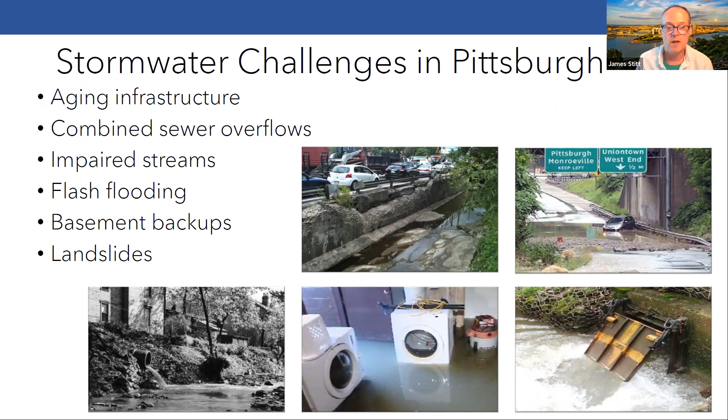So a little more than 75% of our system is combined. But these stormwater rules and regs apply to the entire city of Pittsburgh in the hopes of eliminating that water from getting into any of these systems so that it's better managed on site.

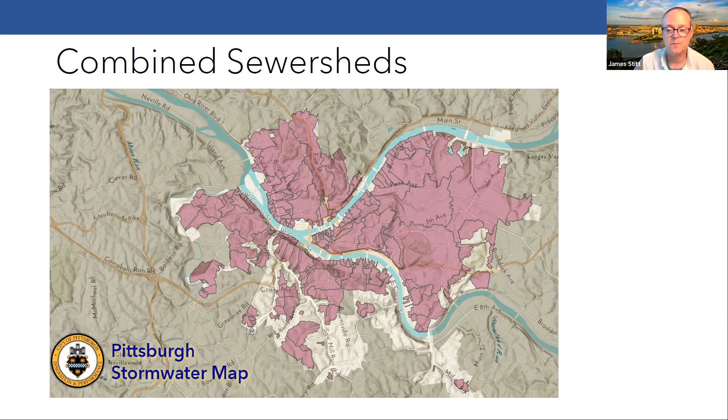And these are events with heavy downbursts, large amounts of rainfall, heavy wind, lightning, hail, tornado force winds, etc. These are the big cloudburst storm events that we see, and they're becoming much more frequent, and they're also a type of storm that our system was never designed to handle. It can handle large amounts of rain when it falls over an extended period of time in slow, steady rainstorms, but these severe events are what cause most of our problems with those high volumes of water getting into the sewers and overcoming the capacity of our system.

So we needed a better way to manage that, not just from a project standpoint, but from a policy standpoint. And so we started working with the city of Pittsburgh on what changes could be made, what we can do. We were able to get some funding from PWSA to address changes in stormwater code, along with support from the Heinz Foundation that allowed us to launch this project of analyzing our code, looking for issues and problems and gaps in the code and ways to make the code itself better and easier to use and follow, as well as ways to make the code more impactful from a standpoint of managing greater volumes and improving water quality.

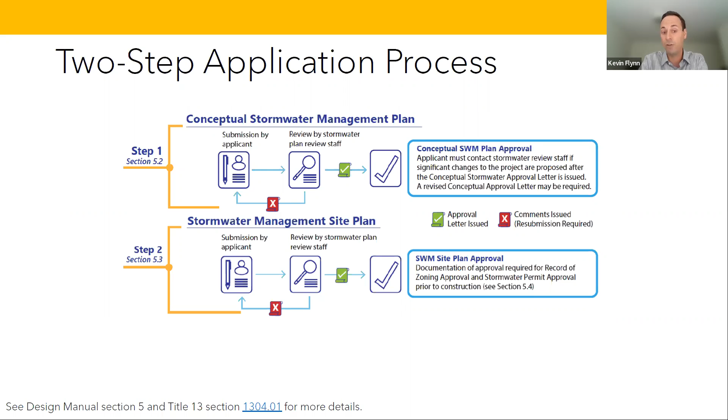Another focus of the update was really, as Marty mentioned, just to align the code with the city's goals and PWSA's goals related to public health and safety and flood reduction specifically. Sorry, next slide here. So one of the new policies actually involves implementing more stringent stormwater rate control requirements in certain areas of the city that have seen significant impacts of flash flooding, as well as basement backups to residents and businesses within those areas of the city.

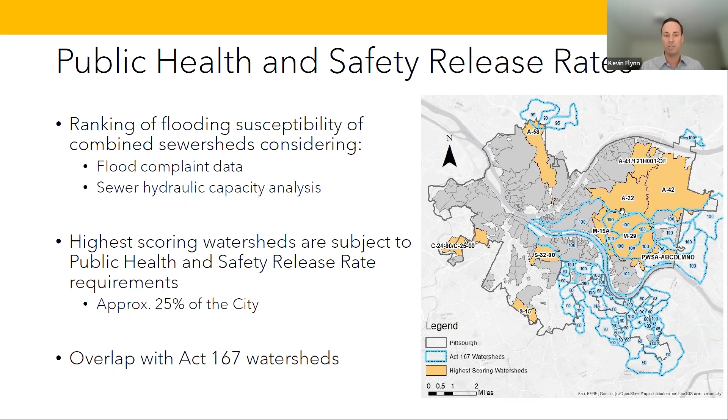So we also looked forward with the guidelines and standards for the design of stormwater management systems in the city. And we strive to incorporate really the most recent climate science and local projections as well, related to the changing rainfall patterns that James presented on early in the presentation. There were really two aspects to that. First was looking at smaller, more frequent rainfall events.

Here, the code defines a 95th percentile rainfall event. So that event is basically a size of a rainstorm that encompasses really 95% of the stormwater runoff volume that's generated in the city in any given year. We looked at that event, which is tied to regulations for stormwater volume reduction and water quality, and looked at historic trends and how the size of that event has changed over time. So the past code identified that event as a 1.5 inch rainfall event.

So analyzing historic rainfall data and trends, based on 67 years of data, we developed a trend of how that event has changed over time, and projected that to the year 2100, which is the planning horizon and basis of the new design guidelines. The requirement is now to control for volume and water quality for an event that's projected in the year 2100, and that's 1.66 inches of rainfall, whereas the past code was 1.5 inches.

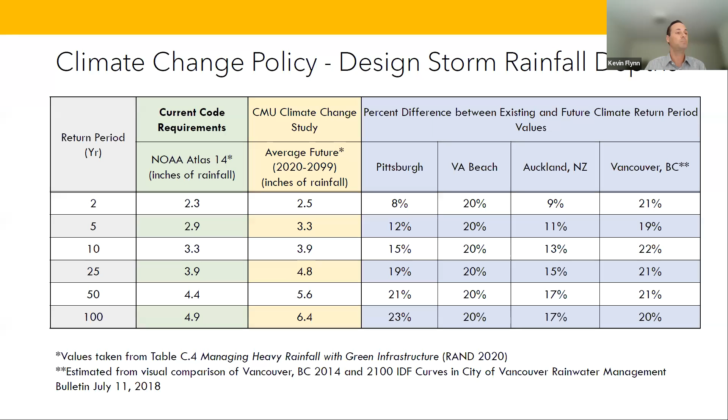And again, as part of that process of evaluating different policies, we did undertake a detailed cost analysis of the impact on the development community of these new regulations. So with increasing the guidance related to required future rainfall as design targets, along with that comes potentially the need for larger stormwater infrastructure and larger stormwater best management practices on development sites. So the question is how much larger? Does it make these sites no longer affordable, or does it affect the pro forma of the development project?

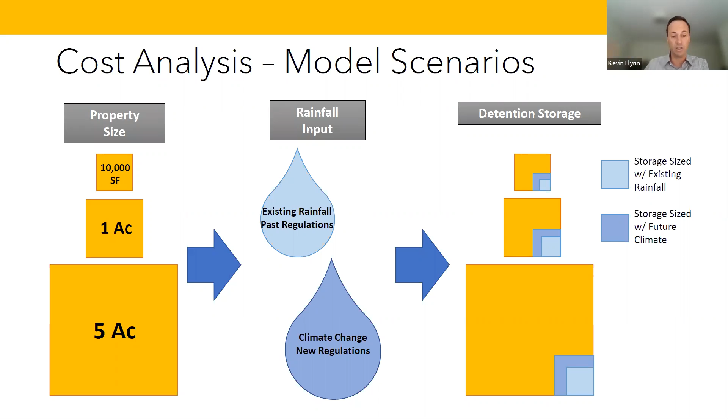And being very transparent with all the stakeholders. Yes, we would be asking development projects to do more and create more stormwater storage to account for these larger events. The analysis showed that can be anywhere between 29% larger and 42% larger, depending on the type of development and size of the development.

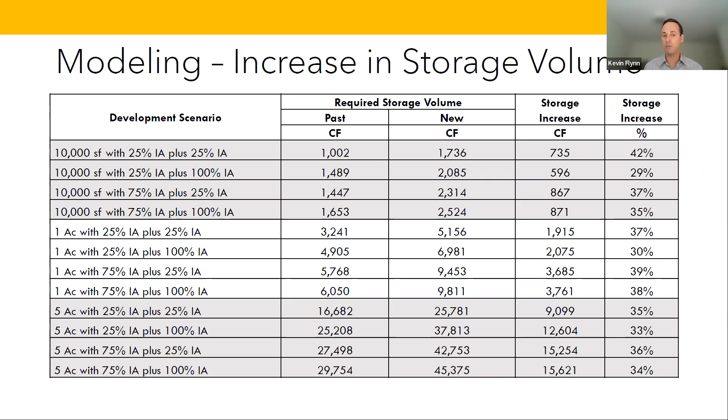And we were able to quantify that as a marginal cost, because as I mentioned, these are all projects that would already be triggering stormwater regulations. So the ask to the development project is to make those systems marginally bigger and to account for these future climate conditions.

Another policy to highlight is the policy and guidance related to technical infeasibility and the use of in lieu fee, as basically an alternative to on-site stormwater management. So really a goal of the city and PWSA is to encourage on-site stormwater management from these development projects. But we understand there's, in many cases, physical constraints or geological constraints which may not allow for compliance with the stormwater regulations on any given development site.

So previously, under the previous regulations, the developer's engineer was really just to come make their case on why it's infeasible, and then for the developer to actually tell the city what they thought the cost of on-site management would be, and that would be the cost of a fee in lieu payment.

So the new policy defines a very specific process to get to that technical infeasibility determination, where the developer's engineer needs to really walk through all the different options on site and demonstrate why infiltration is infeasible, why water reuse might be infeasible, why the use of green infrastructure technologies might be infeasible, and to demonstrate that before being able to apply for a fee in lieu as an alternative to on-site management.

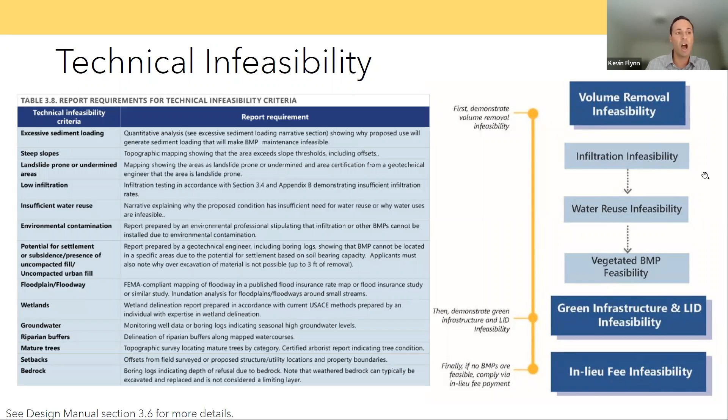And I mentioned before the previous fee in lieu was really based on a developer's engineer's estimate of construction cost, of really first cost to build a BMP on that specific development site. So we took a look at that as well, and what that fee really needs to accomplish would be for the city to potentially create an equivalent stormwater management project somewhere else in that watershed. And the fee in lieu payments previously really didn't account for that in any sort of real way.

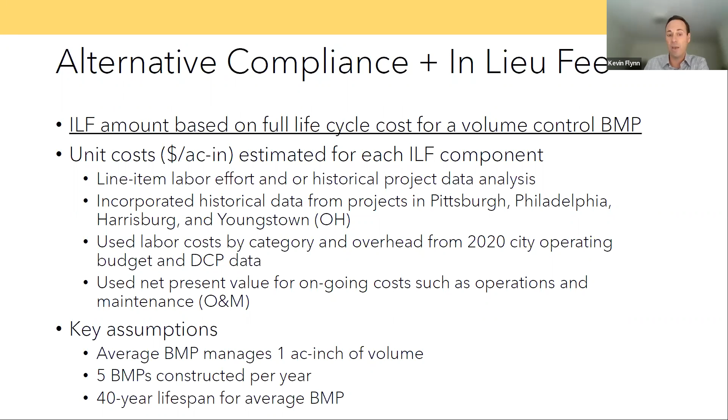So we took a look at resetting that fee in lieu to really match with what it would take for the city to implement an offsetting capital project and operate and maintain that project for what we've assumed a 40-year lifespan for that piece of infrastructure. And this is a bit of a breakdown of that analysis. So as I just mentioned, the previous fee in lieu is really based on those first costs and those construction costs of the stormwater management system.

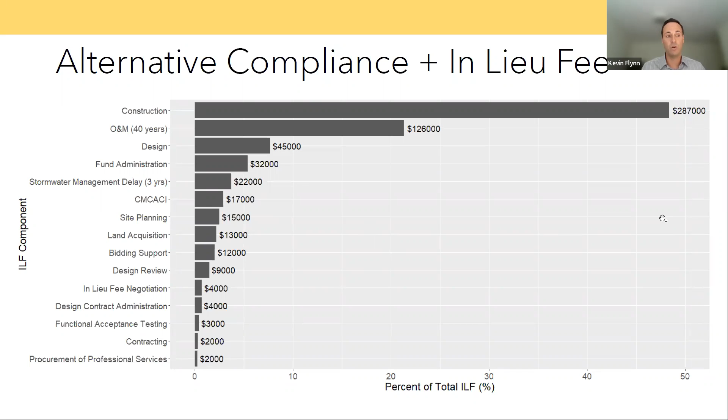But as you can see, that first cost is a little less than half the fee in lieu cost under the current policy. So really looking at real cost to implement an offsetting project, because the goal is to get that stormwater management in that watershed to respond to that development project. So if that can't be done on site, we need to be realistic about what it's going to take for the city or another entity to eventually offset the impacts of that development project.

And Marty mentioned it as well. It was about getting better stormwater management performance on development sites, protecting public health and safety. We recognized in doing that could potentially impact these development projects. So to offset those impacts, a major focus of this project was trying to identify policies that can provide more flexibility as well as more certainty for developers as they go through the stormwater plan review process in the city.

So these are some of the examples of new policies that were implemented along with the new code. Things like expedited review for what the city and PWSA have identified as preferred stormwater management technologies. Actually setting up the program framework for the city to be able to use some of that money that's paid into a stormwater trust fund derived from those in lieu fee payments, and be able to actually use some of that money on private development sites.

Maybe the development project is in a strategic location for PWSA or the city where there's flash flooding issues or other types of drainage issues where that stormwater management can have a big impact, not just on a development site, but within the community.

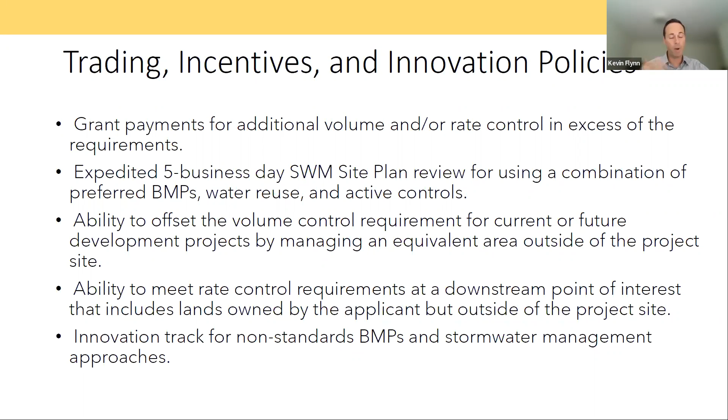So there's now enabling policy within the code that would allow the city to actually provide a grant payment to a developer or to a development project to go above and beyond the regulations. There's also opportunities for development projects to offset and create a banking and trading framework for development projects and landowners that would allow them to maybe construct stormwater management on one portion of their property or even another site with common ownership that maybe is a more advantageous opportunity to construct stormwater systems and possibly at a lower cost for the developer.

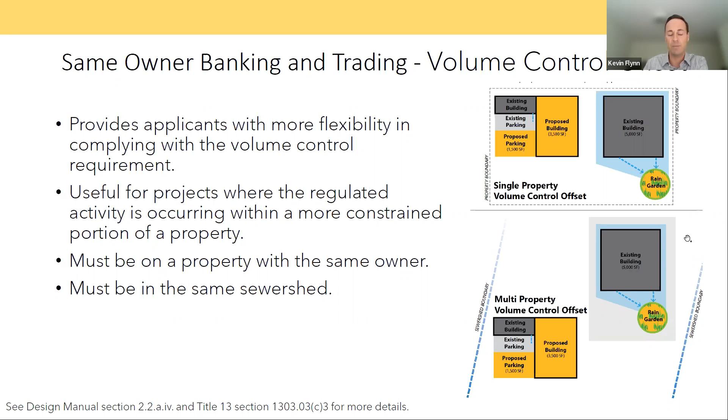So another part of making that development process more predictable and transparent was creating resources for the development community. So the key resource that was created as part of this project was a stormwater design manual for the city of Pittsburgh. But we also see it as a regional technical resource too. So it's a combination of technical resources for the design, construction, and maintenance of stormwater management systems, but it also includes process guidance for developing these projects within the city of Pittsburgh.

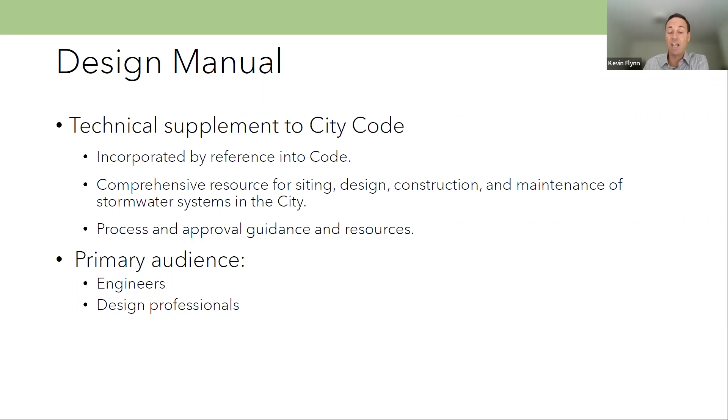And it's implemented in the code by reference. So if there's updates to technology or best practices related to technical guidance and aspects of design of stormwater systems, there's ability to update this guidance without going through the legislative process that Marty mentioned. So I'm not going to go through the entire manual and contents of the manual. It's available to the public. It's available online. I encourage those that are interested to seek out that guidance, and we provide some links to it as well.

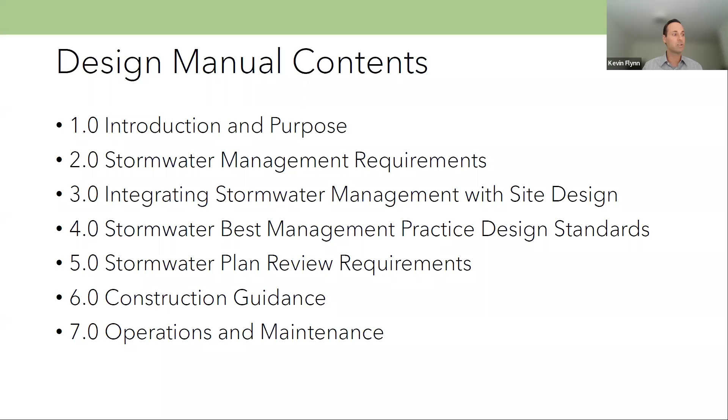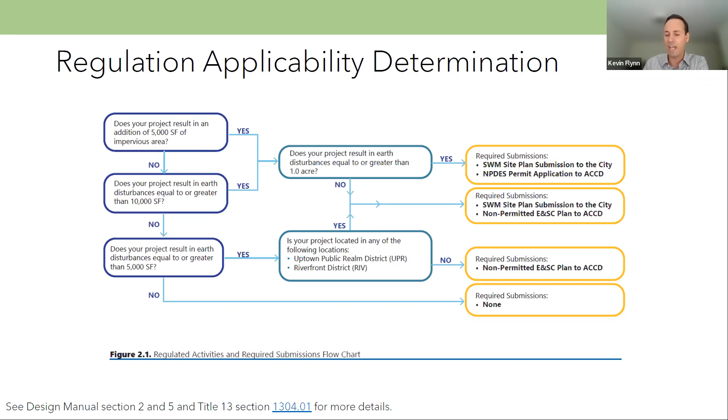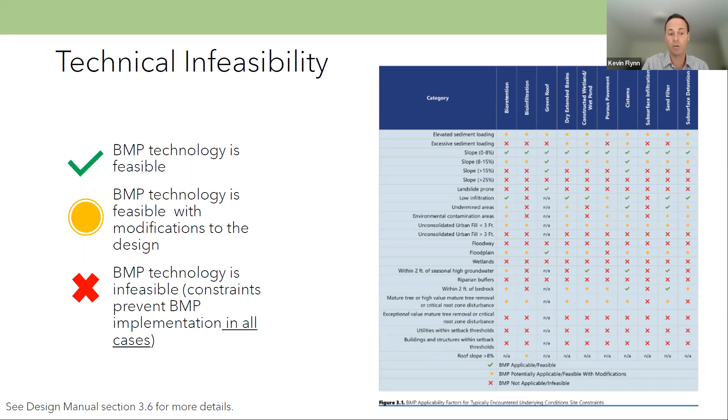I mentioned the technical feasibility. We've tried to map different guidance and potential feasibility obstacles for all different stormwater BMPs to different physical conditions that might be encountered on a development site in the city of Pittsburgh or really anywhere in the region. And then also general guidance for siting and locating stormwater best management practices, and then very specific guidance as well for different types of stormwater management technologies.

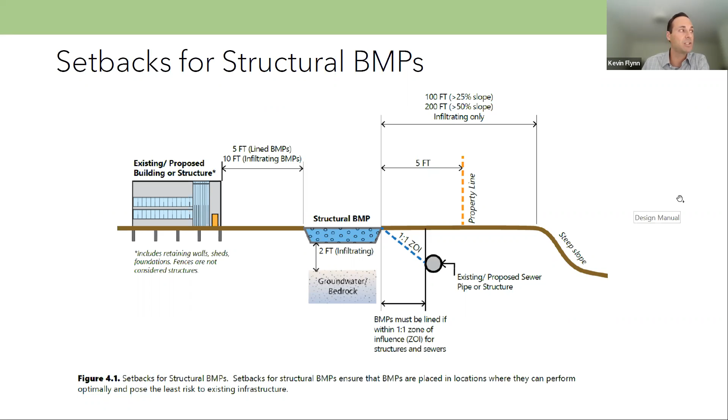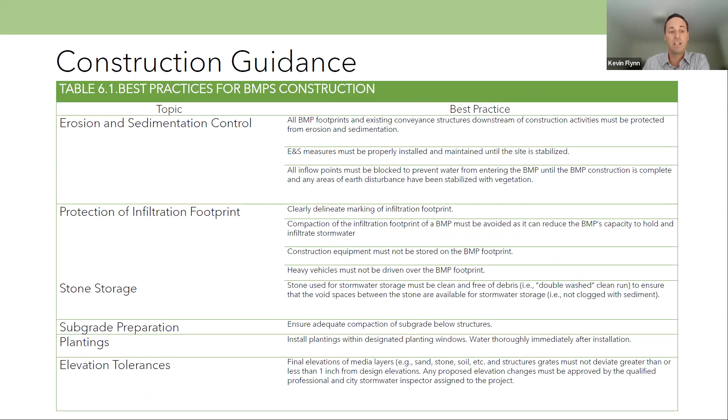Guidance for construction best practices, as well as guidance tied to required inspections by the City Department of Permits, Licenses, and Inspections. And then just simple checklists to help applicants produce complete applications to the city, as well as try to have the applicants understand exactly what the plan review staff is looking for as they review these applications, both from an administrative perspective and as part of the technical review.

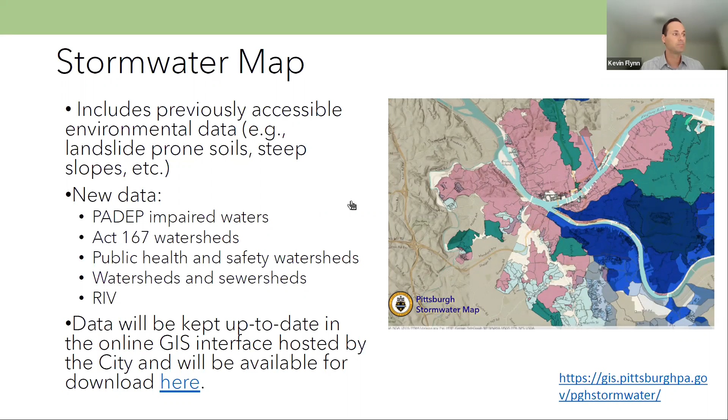Really another important resource that's also publicly available, there'll be a link in this presentation, is an environmental map really focused on all the geographic data that we were able to compile related to planning and design of stormwater management systems within the city of Pittsburgh. And all the source data is available too in this online resource for folks who want to download that and utilize that as well for stormwater planning and stormwater design.

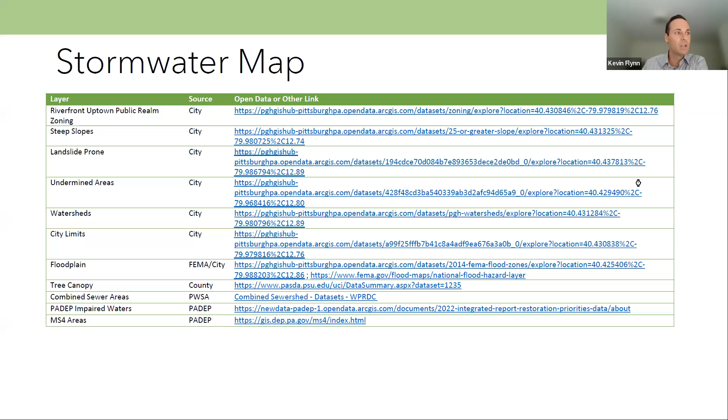I'm going to give it back to Marty to hopefully tie us up here, and then we're going to open it up to the group for questions. So thank you. Yeah, thanks, Kevin.

So that was a lot of content in a really short time, and really just want to hit home that we really explored a lot of different options. I think if you would have asked me at the beginning of the project, I would have absolutely assumed that the most logical change would be to make stormwater management plans and volume and rate controls required at a lower threshold of disturbance. I would have said, oh, obviously to manage more stormwater, we'll just require more projects to do it.

And through a variety of technical analysis and engagement with our stakeholders, we realized that actually wasn't going to be as effective as we had initially thought. So if you want to go to the next slide, just kind of thinking through some of the other main takeaways from this process. Obviously, understanding your local legislative process and really making sure of your timing in terms of notification or when you need to present to certain groups, and making sure that your engagement starts well before then.

We knew that there was going to be a lot of adjustment as this new plan got rolled out. So we really wanted to ensure that from the engineers to developers to all the agencies, everyone was not only aware that it was happening, but also as on board as we would hope they would be. And I feel that we really did a good job by making sure that we were transparent about what that means in terms of cost, what that looks like in terms of certain site characteristics, and really going the extra mile to ensure that it wasn't going to be a huge shock when this came into effect.

And the biggest piece of the new code is the future climate change projections and ensuring that those are required when designing stormwater infrastructure moving forward. Really trying to ensure that the new code actually addresses local flooding and basement backups, and being able to demonstrate that there are more regulations in areas that we know have more problems.